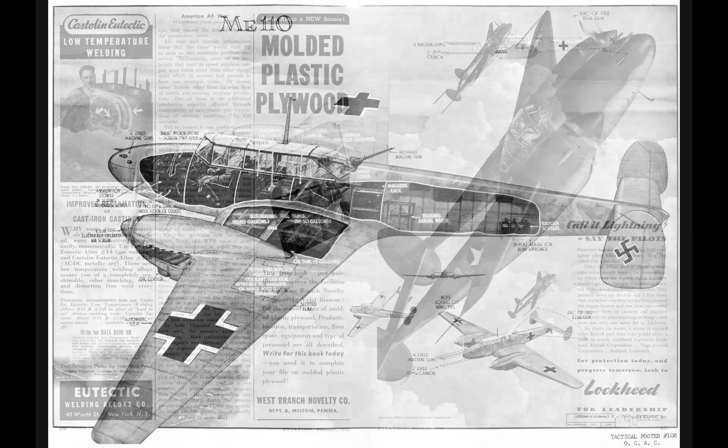It was competitive with enemy single-engine fighters throughout the war and was employed in other roles due to the plane's versatility. In regards to a twin-engine plane that really couldn't compete with single-engine fighters in air-to-air combat, the most classic example I can come up with is the Messerschmitt Bf-110.

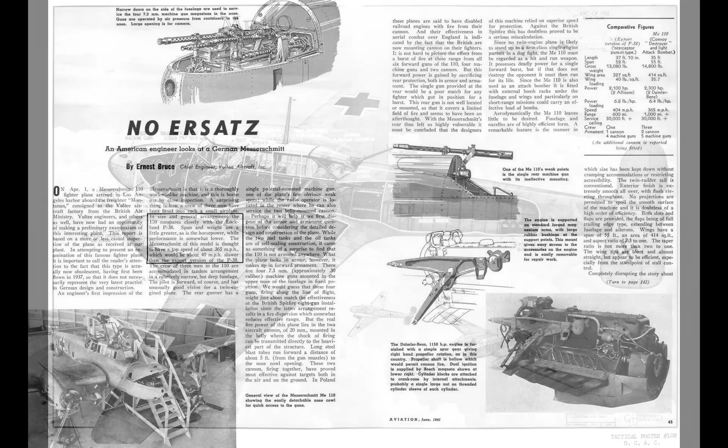The other plane that was often compared with the P-38 was the British Mosquito. I don't need to go into too much detail on this right now. I did talk about it a little bit in my Mosquito video, but I'll be covering this comparison a lot more as this series continues.

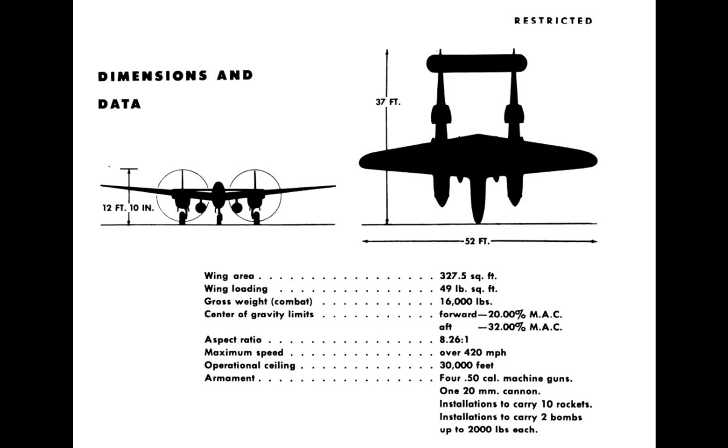The P-38 was Lockheed's answer to a U.S. Army Air Corps proposal made in 1937 that called for a high-altitude interceptor, they used that word, interceptor, capable of reaching 360 miles per hour and capable of climbing to 20,000 feet from sea level in 6 minutes. Now, this was a very tall order in 1937.

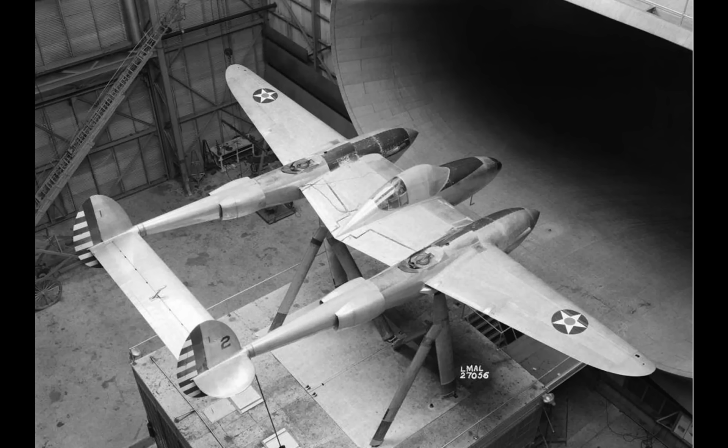Lockheed wanted not only to design a plane to reach these relatively lofty goals, they wanted to exceed them by building the first fighter plane to be capable of reaching 400 miles per hour in level flight. At the time design work started, there were no aircraft engines powerful enough to enable a single-engine fighter plane, not a race plane, but a fighter plane, to reach that speed. Thus, Lockheed had to use twin engines to comply with both the Air Corps proposal and their own goals.

The project was a huge undertaking for Lockheed, not only because of the extreme for the time requirements, but much more significantly, and I think a lot of people overlook this, because Lockheed had never built a fighter plane before. In fact, they had never built any true combat airplane.

In fact, the Vegas were about equal in speed to contemporary fighters from the mid to late 1920s. The Vega also had tremendous range and altitude capability. So Lockheed had a good handle on performance in terms of speed and altitude. They also understood multi-engine aircraft, having built the excellent Model 10 Electra in 1935, which would do about 195 miles an hour.

Before we get into them, I want to say there had been other twin boom airplanes before the Lightning. In World War I, Caproni built bombers with twin booms. In the late 1930s, Fokker had the G-1, which was a decent airplane. Hughes had the D-2. Some say the P-38 design was stolen from Hughes. I don't think that's likely. I think it's more likely both design teams simply reached the same conclusions when looking at the data requirements and available engines of the time.

So let's get back to those sketches from Kelly Johnson to get an idea about why Lockheed chose this design. I'll go through these pretty quickly. This one is what I'll call a conventional twin-engine airplane with engines mounted on the wings, like this B-26 Marauder. This is the layout used by the vast majority of twin-engine propeller-driven airplanes from World War II up until today. Normally, if you're going to design a twin-engine prop-driven airplane, this is going to be your go-to configuration.

Now these two are interesting. They have twin engines mounted in the fuselage with some sort of mechanism set up to drive propellers out on the wings. One example has rear-mounted pusher props. As far as I know, no production airplane has ever flown with either of these configurations, and even without the complexity of those prop drive mechanisms, I don't think these designs would have worked out, for reasons which will become apparent.

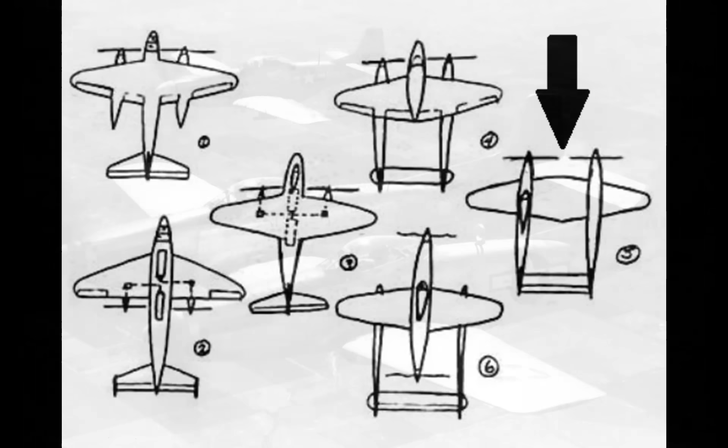This one is a twin fuselage design, which should not be confused with a twin boom design - it's not the same thing. The twin fuselage layout was famously used on the P-82. I have to say I find this idea a little disturbing. I feel that if I flew such a craft, every time I looked out to one side I would feel like I'm flying too close to another airplane. Personal feelings aside, no question that this worked - the P-82 performed pretty well.

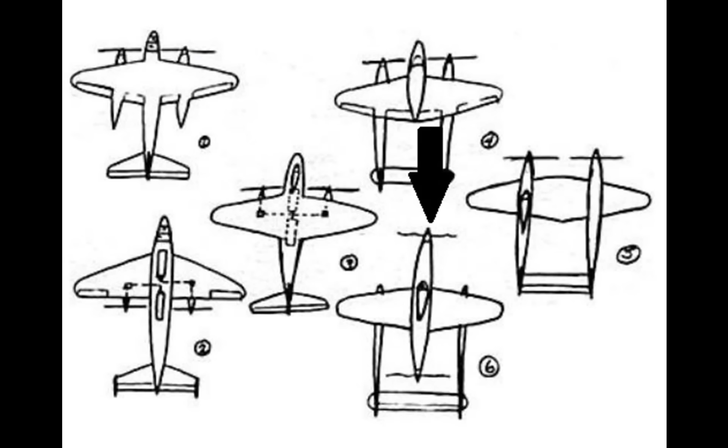So that leaves us with this one, the push-pull design using twin booms. There have been planes like this, and they can perform pretty well. But the downside is that once you put two engines in the fuselage and then whatever else you need - armament, seats, or whatever - there's not a lot of room left. For example, the Cessna 337 has the push-pull layout and twin booms. It's a wonderful airplane, I have flown one. It has plenty of performance, great flying qualities, some real advantages over a conventional twin. However, it's very short on baggage space for a six-seated airplane.

In my view, it's that lack of space in the fuselage that really kills off these three contenders right at the start. Why? Because of the turbocharger. Turbocharging systems took up a lot of space in the 1930s and 40s, and these three configurations just don't have any place to put all the needed components. Now, why bother with turbochargers? Well, because Lockheed was going to need to use some form of secondary supercharging, or second stage supercharging, on the P-38 in order to get the desired performance, and that really had to be a turbocharger for several reasons.

The chosen engines were Allison V-1710s. They have a gear-driven centrifugal supercharger built into them, but it's just a single stage and not capable of delivering power at high altitude, which the 38 was going to need. The P-38 was going to need power throughout a wide range of altitudes. A second stage was needed to do that, and Allison didn't have a second stage mechanical supercharger for their V-12 at this time.

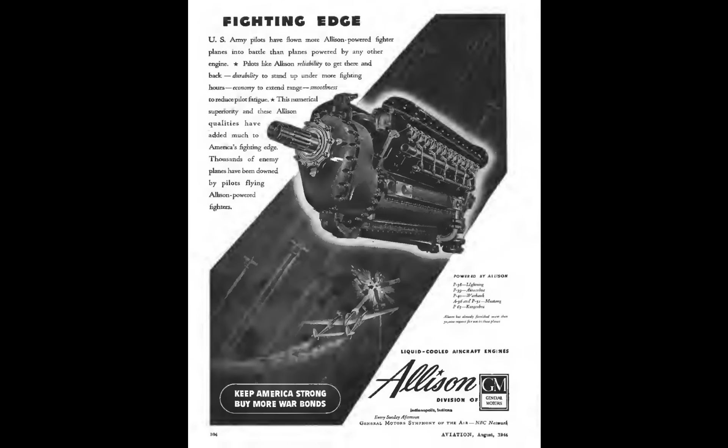In fairness to Allison, neither did Rolls-Royce, Daimler, or any of the other aircraft V12s in production in 1937. Allison hadn't bothered with a second stage mechanical supercharger because the Army Air Corps was going all in on turbochargers. I have a whole video explaining the history and reasons for that, the technical reasons, but the short version is...

NACA had determined and published in a report that a turbo, which was called a turbo supercharger at the time—to mesh with modern parlance, I will frequently just call it a turbo or turbocharger—had significant advantages over a mechanically driven supercharger.

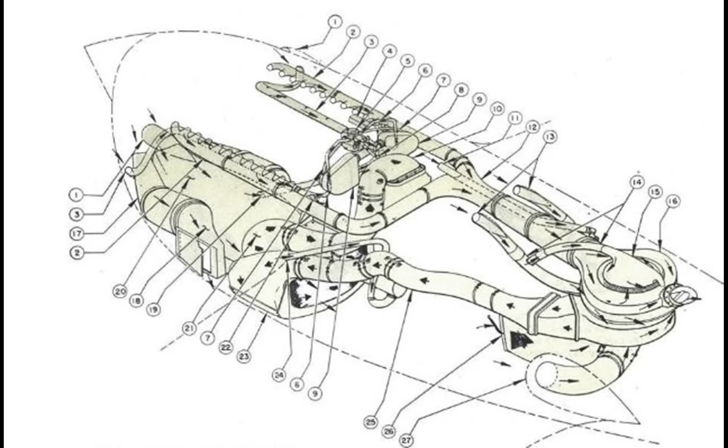The Army Air Corps really latched on to the information in that report and wanted turbos for the second stage on high altitude airplanes, as evidenced by the fact that nearly every high altitude U.S. Army Air Corps plane in development around this time and up until U.S. entry into World War II was turbocharger equipped, including the B-17 Flying Fortress, B-24 Liberator, the P-43, which was a predecessor to the P-47, the P-47 Thunderbolt, and the P-39 Airacobra, although the Airacobra was not produced with its turbo, and thus it turned into a low-altitude airplane. And, of course, the P-38, which has turbochargers.

This means Lockheed had to use the turbos for three main reasons. First, they needed a second stage to get the performance they wanted throughout that altitude range. Also, the Army Air Corps wanted turbos. And lastly, there was literally no other choice for the Allison V12.

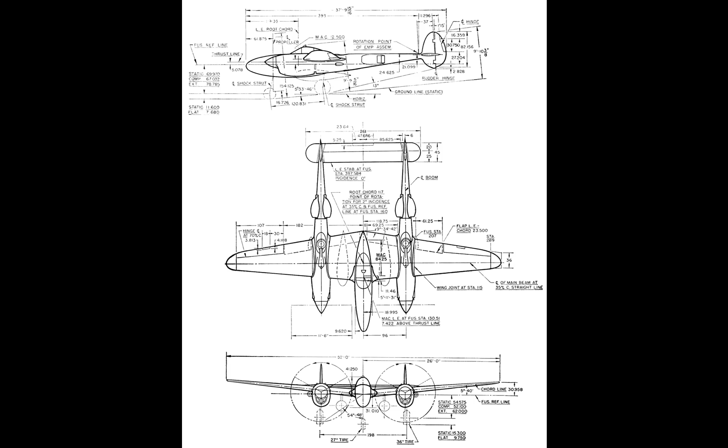The need for turbos eliminates these three designs because you simply can't fit the turbo systems in there. I'm not sure why the twin fuselage design was eliminated, but I think it was due to weapon placement concerns. I'm basing that on the fact that Lockheed mentions the P-38's weapon configuration a lot in period publications. They were very proud of the centerline mounted weapons.

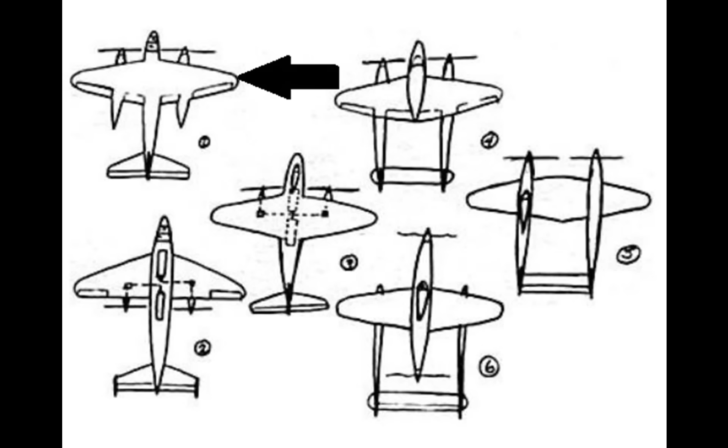The twin fuselage design would not have allowed that much firepower to be placed right in front of the pilot. So what about what I'm calling the conventional layout? Well, it certainly proved itself in nearly every role in World War II. In typical fighter versus fighter combat, it usually didn't work out that well, but in just about everything else, this design excelled. So why not the conventional configuration? I think that answer is going to be self-evident as we go over the plane's design.

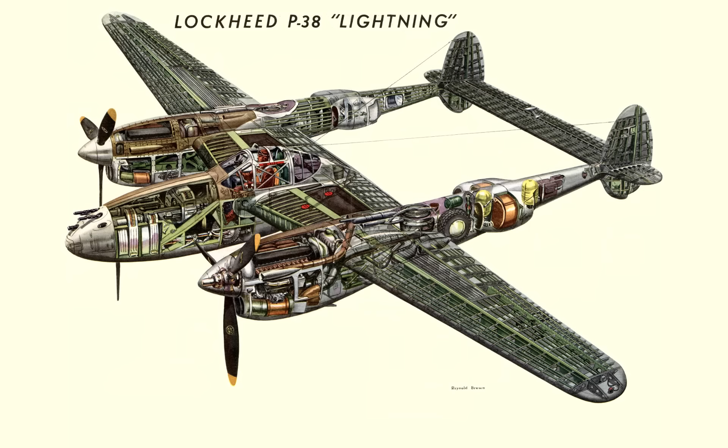So let's take a look at this cutaway diagram to get a good idea of how everything's laid out in this airplane. Let's look at those twin booms. At the front, we have a Curtiss Electric constant speed propeller. Right behind that, we have an Allison V1710 liquid-cooled V12.

On the left boom, and we're talking about production airplanes right now—the prototypes are a little different—the prop rotates counterclockwise as seen from the rear. On the right boom, it's clockwise, which would be the normal rotation for an Allison and most U.S. fighters during the war. I'll get into propeller rotation later; there's actually a lot to talk about with that.

The booms are quite large. People underestimate how large these things are. Each one is about the width of the fuselage on a typical V-12 powered fighter. Look at just about any other late 1930s fighter and you'll see that the point of maximum width on the fuselage is usually where the exhaust stacks are.

Under the engine we have two oil coolers, which are fed from air scoops at the front. Now this is a later P-38 because I don't have a cutaway diagram of an early version, at least not a good one. A key difference is the intercooler configuration. A later P-38, much like this airplane, much like a P-47 Thunderbolt, takes in air from below the engine in a scoop that's divided into three sections. The two outboard sections direct air to oil coolers, and the center section delivers air to the intercoolers.

Now, the early 38s are quite a bit different. They have wing-mounted intercoolers, which is why they only have the two scoops, the twin scoops, under the engines, and those, of course, are for the oil coolers.

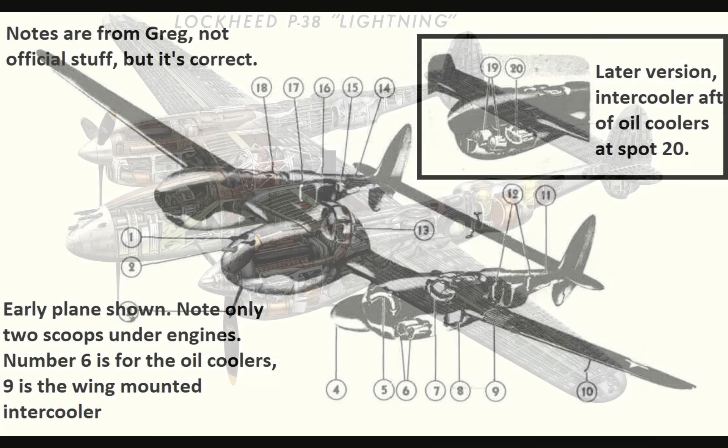Now, just aft of the engine, we have the oil tank for the dry sump system. It lubricates the engine, and that's about even with the wing's leading edge. Near the trailing edge of the wing, the boom contains the turbocharger, aka turbo supercharger, aka turbo. Of course, it still has a mechanically driven supercharger at the back of the engine, but we can't see that in this diagram.

In between the oil tank and the turbo, in between the leading edge and the trailing edge of the wing and the boom, there is a lot going on. Not only do we have the wing structure there, but this area also houses the main gear retraction mechanism, exhaust piping to the turbo, charge air piping from the turbo, coolant lines, oil lines, and more. This is a very busy area.

Aft of the turbo, we have a space for the main landing gear wheel when retracted. Aft of that, an oxygen bottle, two cooling system radiators, and another oxygen bottle. Just aft of that is the battery.

On the other side, the other boom is pretty much the same, but there are some differences. I already mentioned engines and props rotate in opposite directions in a normal US production variant. Also, the left boom has the battery, while the right boom doesn't. In that same area, the right boom has a little cargo compartment instead. You can't put much in it, but it's there. Oh, and the right side wheel well holds a hand crank for starting. There are other minor variations as well.

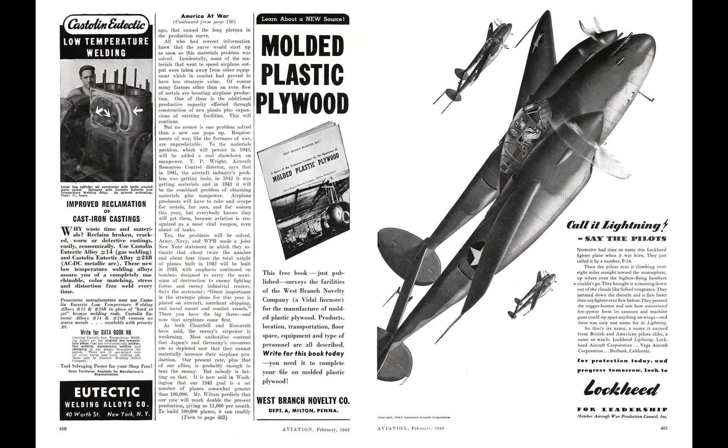You might be starting to see the reason for the twin boom design. In order to get all that stuff into the boom and minimize the cross section by not putting much stuff side by side, the booms have to be really long. So long, in fact, that minimal extension is needed to interconnect them with a tail.

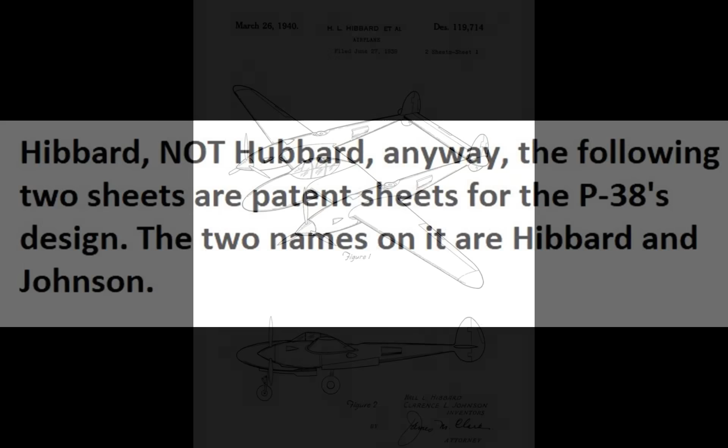In this magazine, we have an article written in 1944 by Hall Hibbard, the vice president and chief engineer at Lockheed during this time. Kelly Johnson was working under Hall Hibbard during the P-38's development, so I think this is a pretty good source. I'll be using a lot of screenshots of this article, but I'll post it in its entirety in the Patreon section.

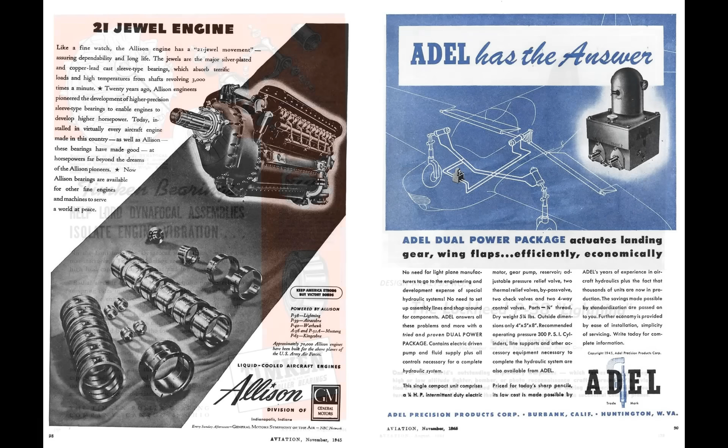It's pretty interesting, not just the article, but the magazine. It's shocking how many ads were in World War II era aviation magazines. Just as a point of interest, most of the pages are mostly ads. We'll be focusing on the article by Hall Hibbard, the first page of which is on the right side here. Each page in the article itself is free of ads, or I suppose you could say the entire article could be considered an ad for Lockheed.

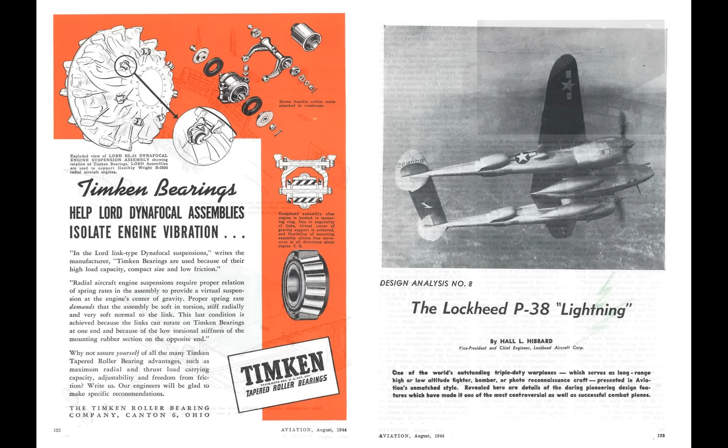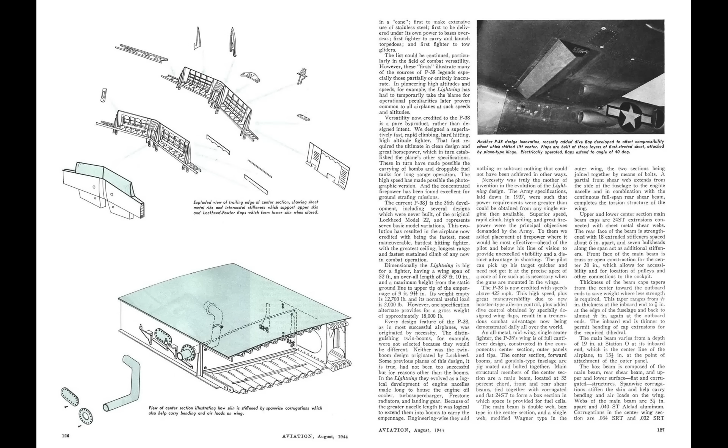Let's see what Hall Hibbard has to say about the 38's design. I'm paraphrasing, but he points out that two engines were needed to reach the performance goals. There just wasn't a single engine powerful enough to do the job in 1937. The armament was packaged in front of the pilot in the fuselage, where the designers thought it would be most effective. Every time I read something from Lockheed about the 38, they almost always mention the weapons configuration. In fact, it's mentioned at least 3 times in this article alone.

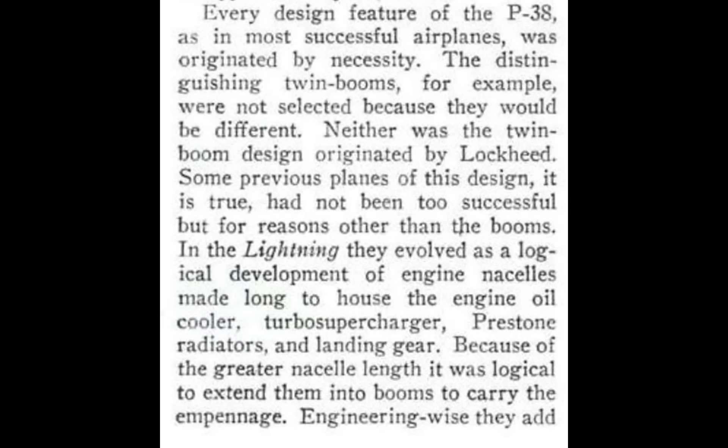Regarding the twin booms, again I'm paraphrasing, but he says that once everything needed was put into the booms, turbos, landing gear, and so on, they were so long that extending them a bit more to carry the tail just made sense. He also points out there isn't really a specific advantage to a twin boom design, so again, it was all about packaging.

Let's go back to our cutaway drawing and finish going over the airplane. The main portion of the wing is not anything exotic. It's a NACA 23016 profile, which was used on various other airplanes, including the Douglas DC-4, aka C-54. It seems to me that Lockheed was trying to go well beyond the requirements of the 1937 proposal from the Army Air Corps.

Not only by getting it up to 400 miles per hour, much faster than the specified 360 mile per hour speed in the proposal, but I think Lockheed also wanted it to have enough maneuverability to combat enemy fighters, hence the wing choice. The P-38's wing gives it a relatively low stall speed for an aircraft with such a high wing loading, and that's a key factor in determining turn performance.

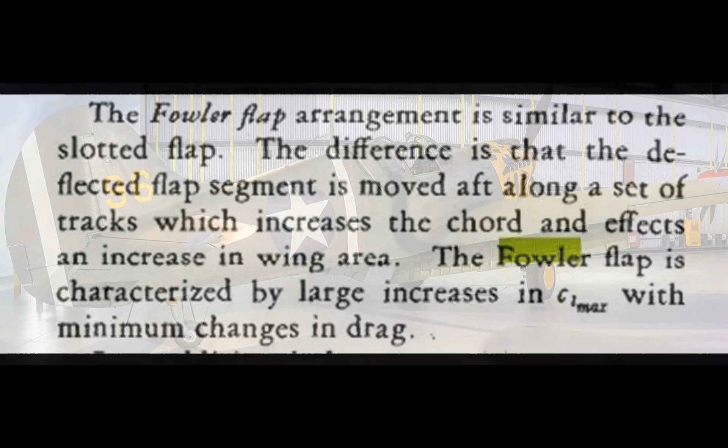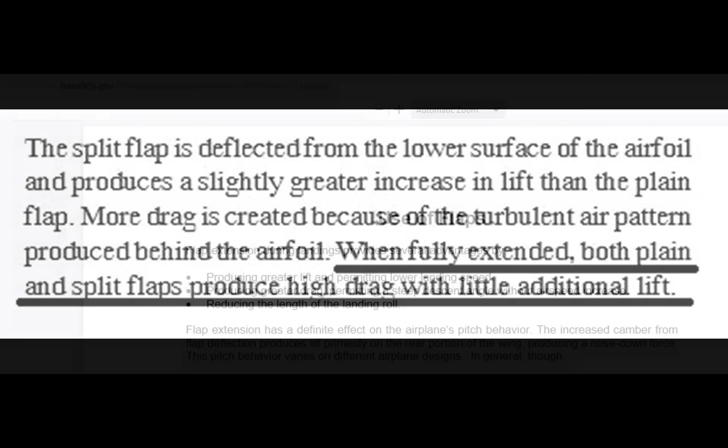To make the wing even more effective, the designers gave it Fowler flaps. Fowler flaps extend in a way that increases the wing area and adds a lot of lift relative to the drag they cause, especially at intermediate settings. Most fighters of the day, like this P-40, had split flaps, which didn't add much lift but did cause a lot of drag, and that was actually the point. They added enough drag so you could point the nose down and descend to the runway without increasing airspeed. That's bullet point 2 here from the FAA.

Split or even plain flaps just don't add a lot of lift. Fowlers, on the other hand, do add a lot of lift.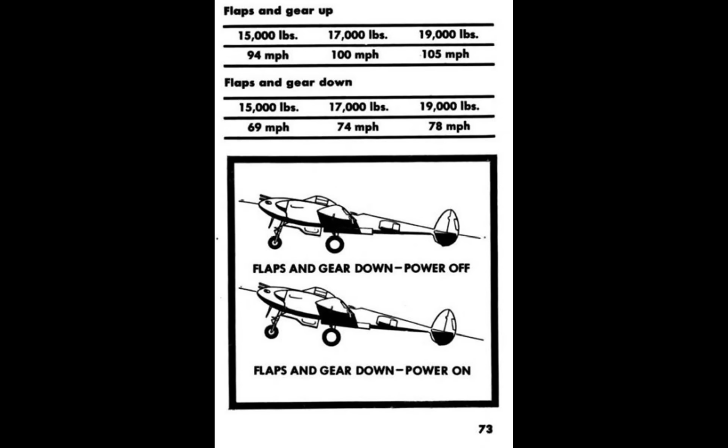Those speeds are, of course, indicated airspeeds, meaning what's read right off the cockpit airspeed indicator. Of course, those numbers are pretty meaningless for comparison to other airplanes until they are corrected to calibrated numbers. The P-38's manual doesn't have calibrated numbers that go low enough for us to figure this out. Plus, there were 2 different pitot tube locations on these planes, which further compounds the issue.

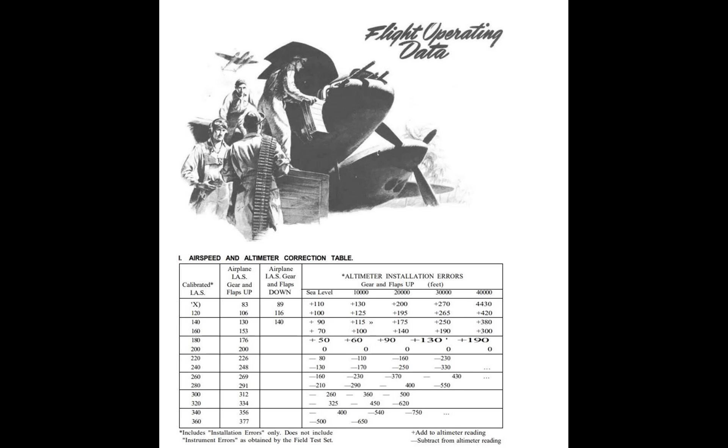Thankfully, the Army Air Force Materiel Center did some testing on a 38 at 14,800 pounds, close enough, and got us exactly the information we need. They found that the calibrated stall speeds were 112 miles per hour with the gear and flaps up, and 88 miles per hour with them down. With the flaps down and gear up, it's 86 miles per hour calibrated.

I really wish I had that data for all World War II fighters, but we just don't. A lot of times I have to take an educated guess.

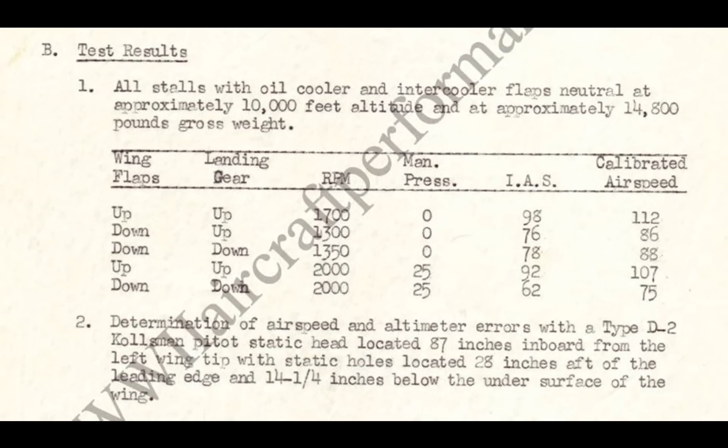Anyhow, power-on stall speeds in the P-38 are dramatically lower than the power-off stall speeds due to the accelerated slipstream over the wing and flaps. As you can see, even with only 25 inches of manifold pressure, and that's not much, the flaps-down stall speed drops another 13 miles per hour. That's huge, and I'm going to talk about this factor later in greater detail when we get into maneuverability.

Let's see how the stall speeds compare to the Spitfire Mark V with its split flaps, the P-47, which has slotted flaps, and I'll also add in the de Havilland Mosquito and P-51, both of which have conventional plain flaps. Not many World War II fighters have a lower stall speed than the Spitfire Mark V. Its numbers are 73 miles per hour and 64 miles per hour, as can be seen here.

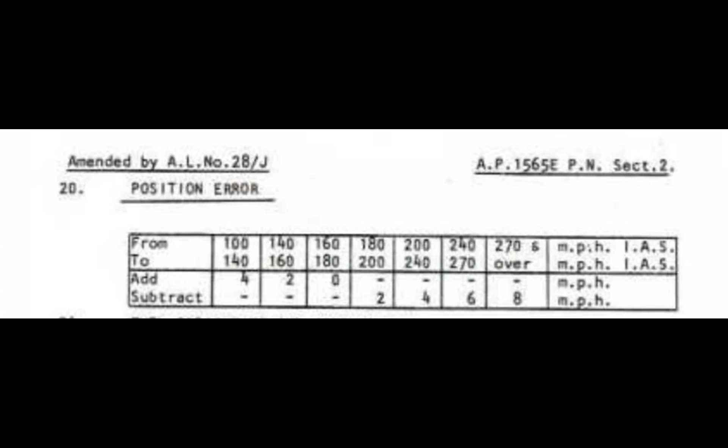The manual does have numbers for calibration, but they only go down to 100 miles an hour. I'm going to have to interpolate off the chart here, and that's not ideal, but it's the best I can do. I figure we need to add about 6 miles an hour to those numbers, so we get 79 and 70 miles per hour. Using the same methods for the P-47, we get 115 and 100. For the Mosquito, we get 105, and let's call it 95.

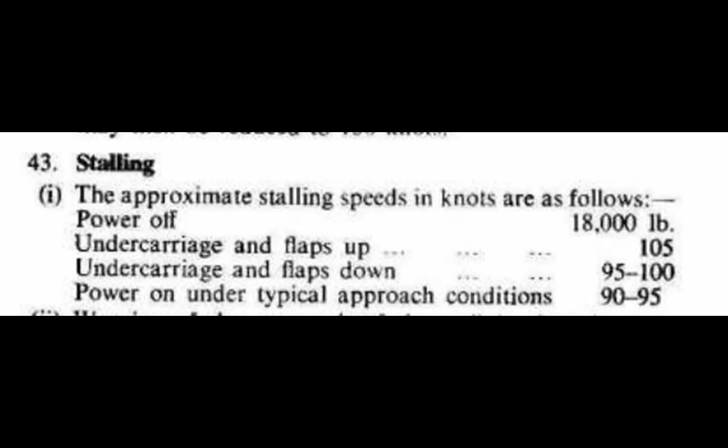For this variant of the Mosquito, I cannot find any airspeed correction data. Either it didn't need it because its airspeed indicator was dead on all the time, which is incredibly unlikely, or maybe I just can't find it. So I'll have to take the Mosquito's indicated numbers and consider them as calibrated. Also note that the Mosquito's weight is a bit higher than it would be if it was set up as a fighter airplane.

But that's okay, I'm not trying to compare aircraft performance just yet. When I do, I'll even out the weights, and hopefully I'll have some better calibrated stall speed data for the Mosquito. Right now, we just want to see the effects of the P-38's wing design and the Fowler flaps.

So here are the numbers. Notice the P-38 has the highest wing loading here, yet even with flaps up, its stall speed is slightly lower than the P-47's. That's a benefit of the P-38's NACA wing. Of course, that wing has its downsides too, which we'll cover later.

Take a look at the flaps-down numbers. The Fowlers make a big difference, much more so than the split flaps on the Spitfire or the plain flaps on the P-51. The Thunderbolt's slotted flaps are about in the middle.

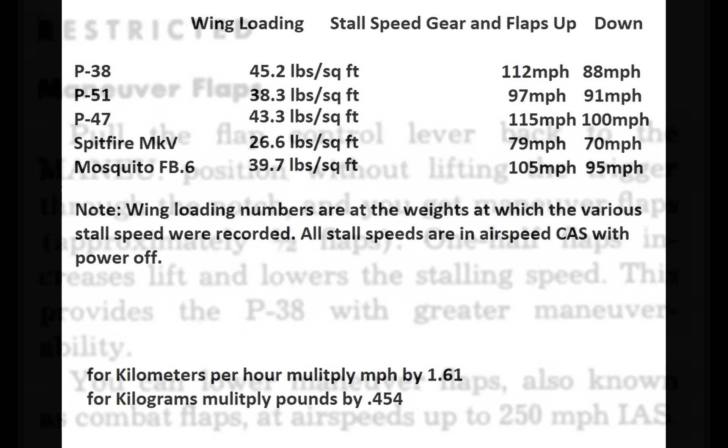Better still, the Fowler flaps can be put halfway down into the maneuver position. This gave a lot of extra lift with little drag. That's kind of the point of Fowler flaps.

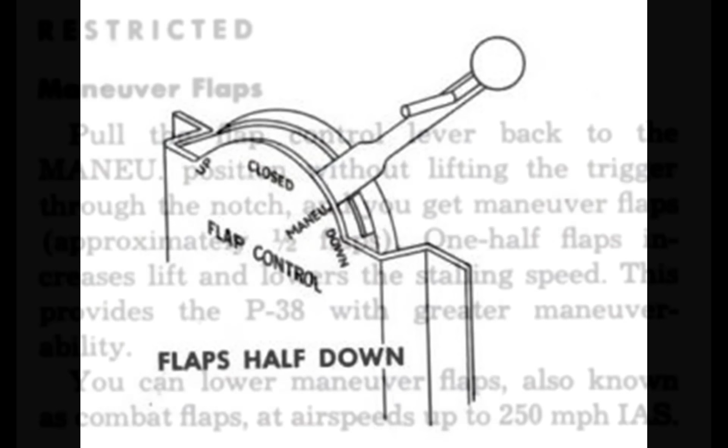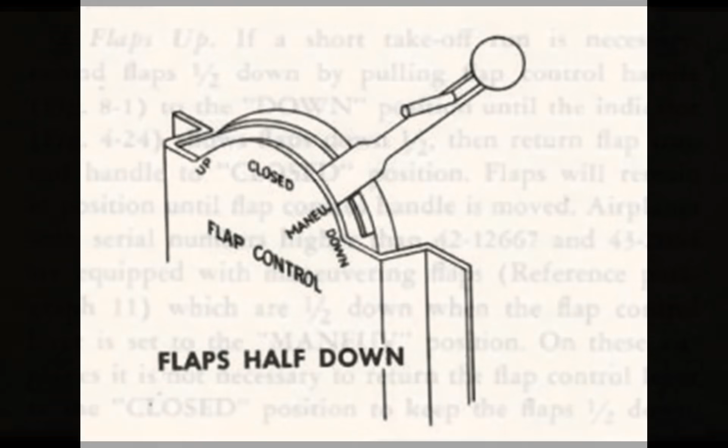Most P-38s, including all G models and later versions, had this maneuver position on the flap handle. All the pilot had to do was put the flap handle there and the flaps went to that position. On earlier P-38s, the position was still selectable, meaning you could still position the Fowler flaps to be optimal for maneuvering, but it required an extra step because there wasn't a designated maneuver position on the handle.

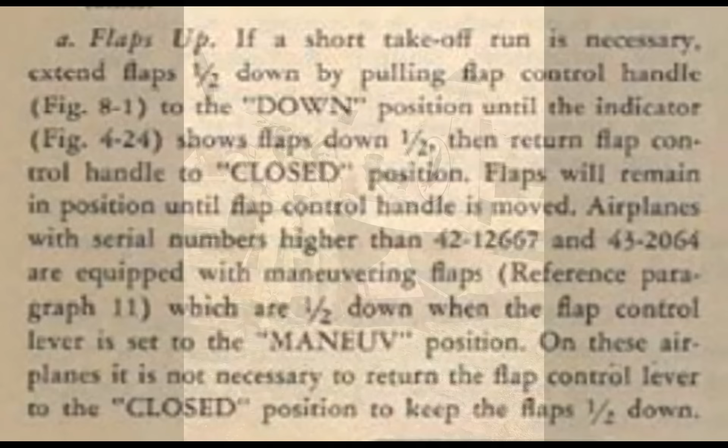On these earlier planes, the pilot had to put the flap handle to down, observe the flap movement, and when they reached the point you wanted, which was about halfway, put the handle back into the closed position. So what I'm saying here is that all P-38s effectively have maneuver flaps. It's just a question of whether it's a specifically labeled point on the flap handle and how easy they are to select.

The takeaway should be the P-38's wing was not super special. It wasn't a low drag wing or a really high speed wing. It was sort of a jack of all trades wing. And with the maneuvering flaps out, the P-38 could really turn. It could actually outturn a lot of single engine fighters due to its low stall speed.

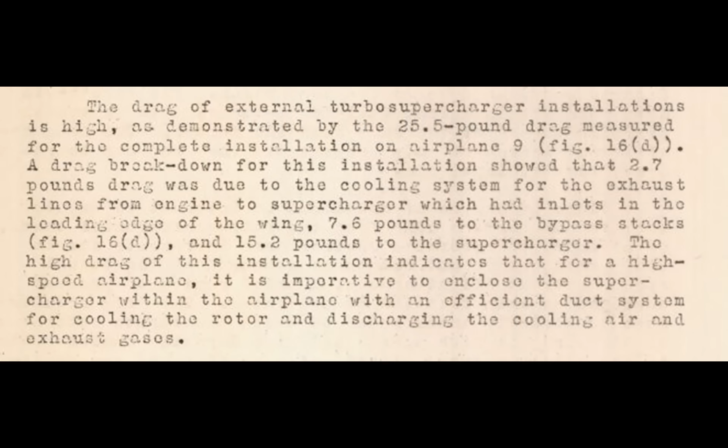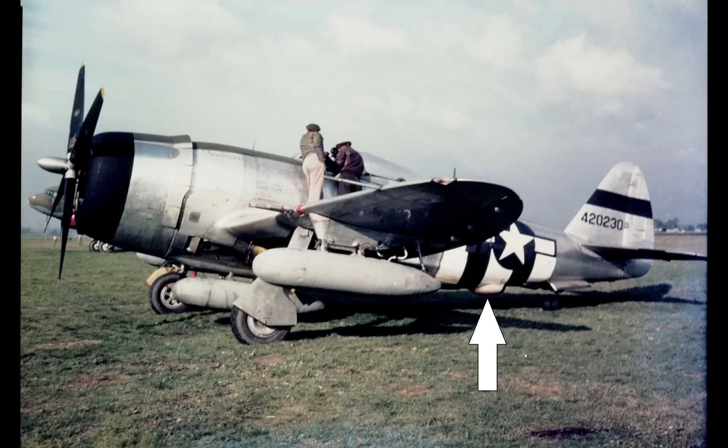For example, take a look at those exposed turbos on top of the booms. NACA discovered just how much drag exposed turbos would cause, and it was considerable. They came up with a fairing to enclose turbos while still allowing for enough cooling, exhaust flow, etc. That fairing was used on the P-47 Thunderbolt. In short, there was a lot of data from NACA coming out about reducing drag, and that benefited the P-47 and the P-51. But the P-38 was just a little too early to take advantage of it.

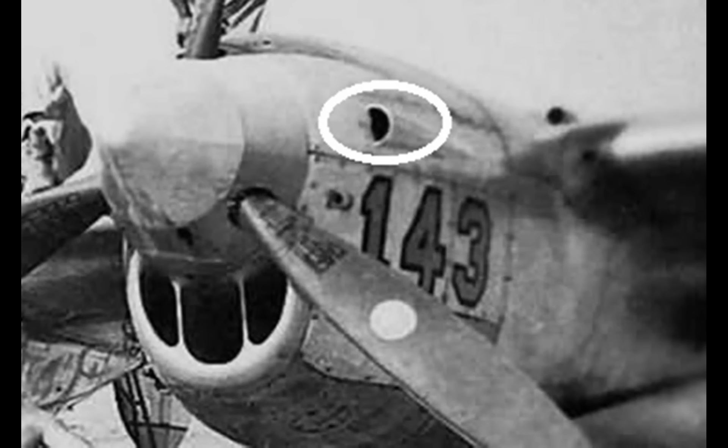On the subject of drag, if we look at the plane closely, you'll see all kinds of little air scoops on the booms. Zooming in, we can see a scoop on the side of each engine nacelle. This one cools the exhaust manifold, and there are a total of 4 of these on the airplane. Exhaust manifolds on a turbocharged engine get hot, and the P-38's cowlings don't have a lot of room in them, so these cooling scoops were needed.

Notice these little tiny scoops. Again, there are 4 of them on the airplane. These cool the spark plugs, which get hot due to their proximity to the exhaust manifolds. These scoops connect to little tubes called blast tubes. They blast ram air onto things that they need to keep cool. There are quite a few of them on the plane, and they also cool the magnetos and tach generators.

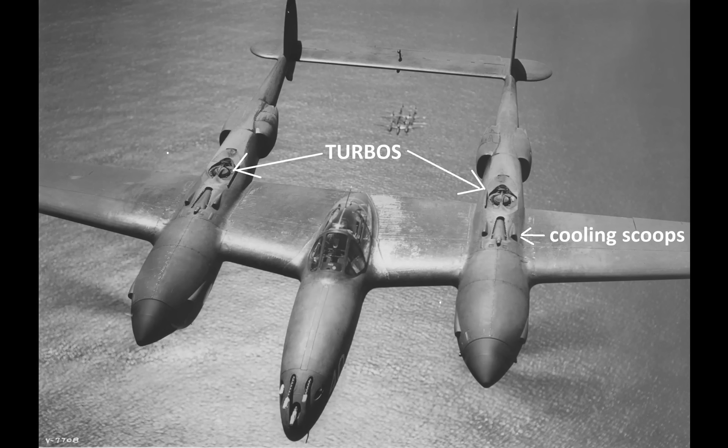On the tops of the booms forward of the turbos, we have more scoops. These are also connected to blast tubes, and these cool components of the turbos. Then we have this big scoop under the trailing edge of the wing. This provides ram air into the turbo. In other words, this is the scoop that provides air that's needed for the engine to run. It's not for cooling. Interestingly, the P-38 has two sources of inlet air for the turbochargers.

This ram air scoop is the normal source, but in most versions of the plane, the pilot can select filtered air to come from the wheel well. This will cost a little bit of power, but it will protect the engine by only letting in filtered air. This is great if operating off of a dirt runway. Certain P-38s have this selection slaved to the landing gear position. In other words, gear down, you get filtered air, and with the gear up, you get ram air for more performance.

A lot of fighters of the period required additional components to get a decent amount of air filtration for operating in rough conditions. These usually robbed some of the airplane's performance, but that's not the case with the P-38. It gets the best of both worlds in that regard, and it's built right into the airplane, so that was pretty forward thinking of Lockheed.

Aft on the booms, we have the radiators for engine cooling, and we have 4 of them back there, and they're big. All of these scoops, the exposed turbo plus the wing design and the overall size of the P-38, as well as some other things we'll talk about later, mean it has quite a bit of total drag.

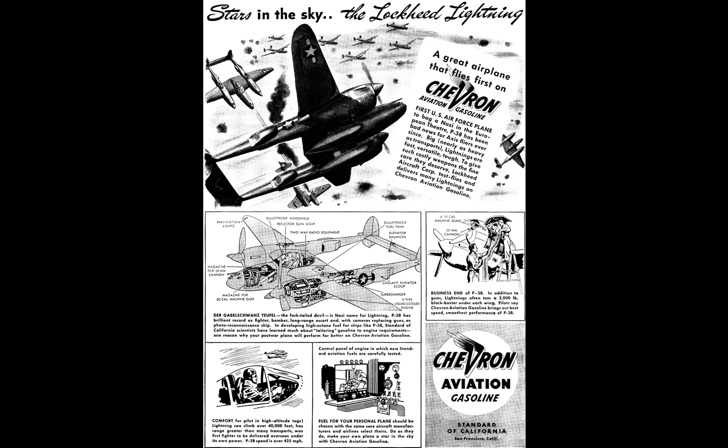Now that's not bad, but comparing it to other 2,000 horsepower fighters, it's not that great, and that's because of all the drag. For example, the early P-47B Thunderbolt will go about 20 miles per hour faster, a little more, a little less, depending on propeller type, and that's with 300 less horsepower. And we don't normally think of the Thunderbolt as a plane with low drag, although actually the Thunderbolt is pretty slick for how large it is. But the P-38 is not a low drag airplane, that's my point.

None of this means that Lockheed wasn't trying to minimize drag. They were. External surfaces were flush, they were butt jointed. It was the first U.S. fighter to be built this way. It also utilized flush riveting in some sections. It's just that the size, the frontal area, and all of those cooling scoops, as well as some other things, added a lot of drag.

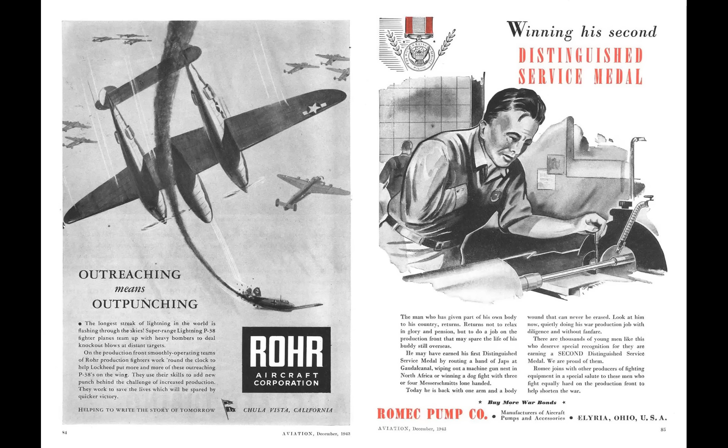Now I want to talk briefly about the cockpit section. In some period manuals, they call this the gondola, sometimes the fuselage. I think I'll go with gondola and try to use that just for the sake of continuity. The gondola houses from front to back the main armament, cockpit, radio equipment, and at the very back, hydraulic reservoir.

Speaking of hydraulics, like most U.S. fighter planes, the P-38 had a hydraulic system. This is in addition to the hydraulics that operated the brakes. That's a separate system, and that was pretty standard on warplanes by this point. But we're talking about the main hydraulic system, and that operates the flaps, landing gear, radiator coolant shutters, and more. Some airplanes it does cannon charging, some airplanes it does aileron boosters.

There's an engine-driven hydraulic pump powering this system on each engine, thankfully. If it only had a hydraulic pump on one engine, then if you lost that engine right after takeoff, it would be a disaster, as you wouldn't be able to retract the gear, thus you might not be able to continue your climb. I'll get into that more when we discuss multi-engine flying as it relates to World War II airplanes.

Up front, there's a lot of firepower, four .50 caliber machine guns, and normally a 20 millimeter cannon. There were some other configurations, but that's the standard setup. Now there's room for a lot of ammunition up there, up to 500 rounds per gun for the .50 cals and 150 rounds for the cannon.